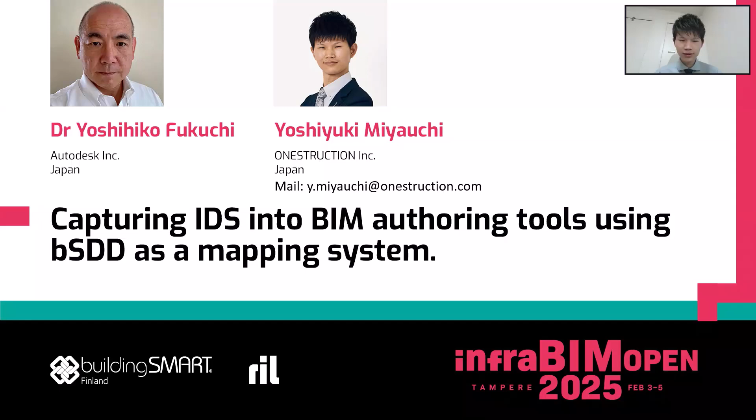Today's agenda: this is a good time to learn more about bSDD and IDS.

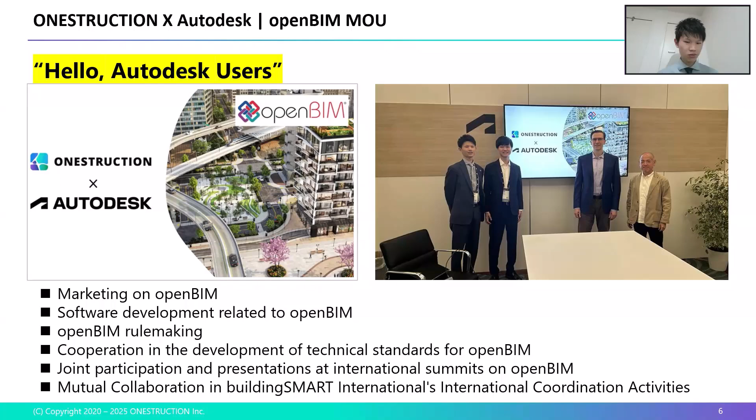First, let us introduce the value of bSDD and IDS. Various technical standards live in the economy with openBIM. Although there are many, they help each other and realize an ecosystem. This ecosystem is very flexible and has made many people happy.

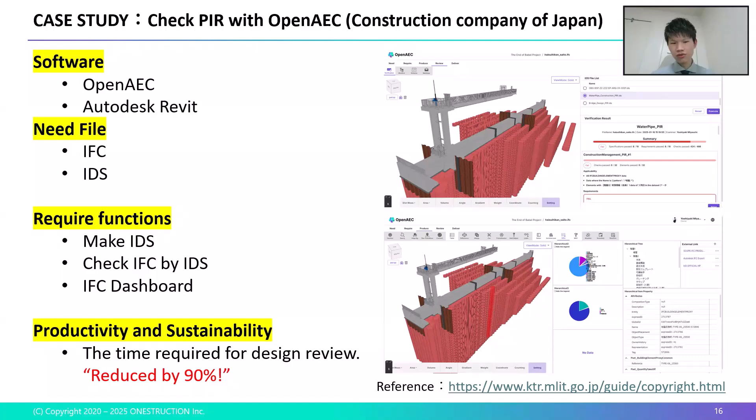This is a specific approach. First, an IDS with design performance details is created in OpenAEC. OpenAEC is designed to make the creation of IDS as easy as possible. You can specify what information requirements are requested for what part of the IFC data.

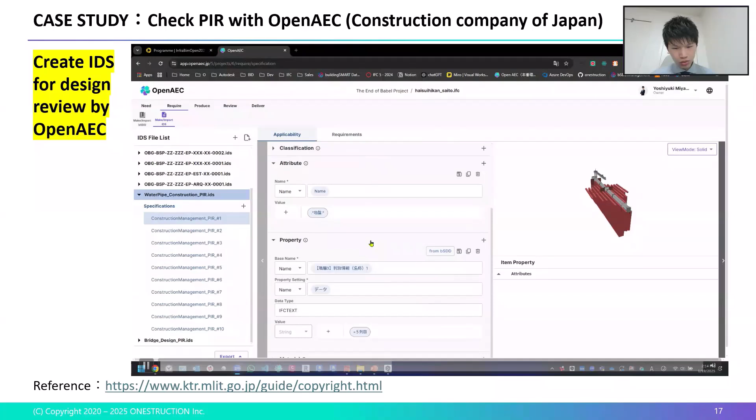Let's take a look at what's in the IDS. Various conditions can be added to the IDS. In IDS, you can configure conditions using 6 different approaches. The most commonly used would be entity, property set, and classification.

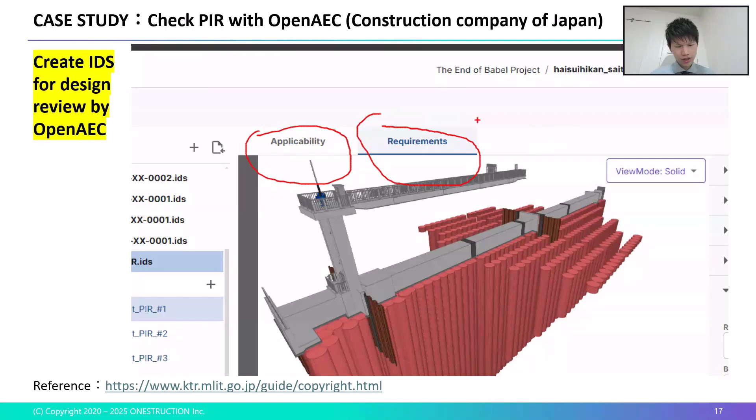Within the software, you can describe the information requirements separately from where they are applied and what they are about. Flexibility is also perfect, as you can use regular expressions instead of just stating values. The list of IDS conditions can be exported to PDF so that information requirements can be shared with those who cannot read IDS.

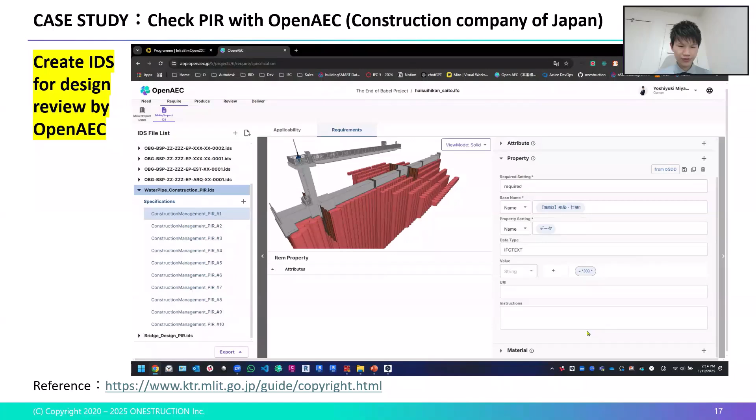Okay, next, upload IFC to OpenAEC and check it with IDS. The check screen allows viewing of the BIM data. Select the IDS you just created and press the Execute check button.

Okay, now checking. Please wait a moment as we check a large number of objects, nearly 500. It will probably take about 30 seconds to complete the check. This is checking now, okay, just a moment. Okay, check is complete. Let's take a look at the check results.

You can see how many IDS objects are being checked and for which conditions the violations exist. Of course, it's also easy to identify the objects where violations exist. All that remains is to send the design review results to the design staff and inform them of the validity of the design results.

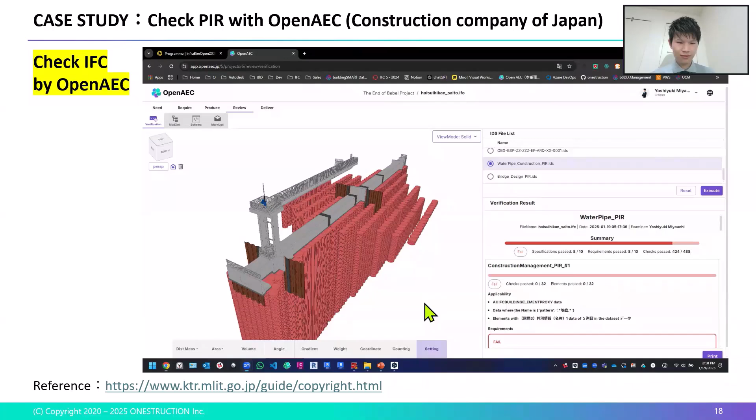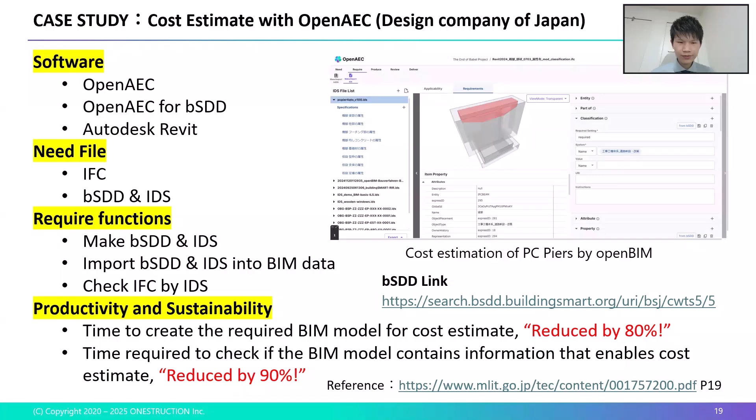Let's show a specific approach. In Japan, cost estimate has traditionally involved a great deal of labor. In particular, the process of assigning the information necessary for cost estimation to BIM, and its accuracy, have been viewed as problematic. However, with the advent of bSDD and IDS, a game changer has occurred in Japan. The issues that had been a problem up to this point, namely the time and accuracy of the granting process and the reliability of the BIM data, were solved in one fell swoop.

First, the totalization criteria were converted to bSDD with OpenAEC. bSDD can immediately convert even legacy criteria into machine-readable data. It can also specify the set of properties that each class has and the values that the properties should have. This is the bSDD data dictionary in Japan.

Once the bSDD is in place, the next step is to create an IDS. OpenAEC can create an IDS on its own, but by extracting it from a trusted source such as bSDD, an IDS can be created as an accurate and reliable information requirement.

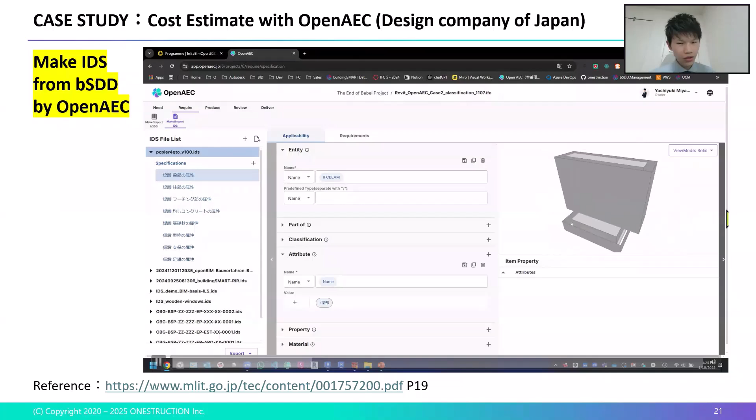All property sets required for the totalization are uploaded to bSDD. Use Revit to create a BIM model for cost estimating. The Revit plugin OpenAEC for bSDD allows anyone to easily and accurately add bSDD and IDS information to BIM data.

First, decide which bSDD and Revit you want to connect. After connecting the bSDD of your choice, decide which objects in the BIM model will be given information. You can select objects yourself or assign them to each Revit category. Incidentally, OpenAEC for bSDD also publishes an add-in for Civil3D, which allows you to further select objects by layer.

Once you decide which object in Revit you want to give information to, a new dialog box opens up. Select a class from the tree on the left, and the property set associated with the class instantly flows into the screen on the right.

Classification codes are stored automatically. This is okay. Classification codes are stored automatically. All that remains is to create the shared parameter file, which can be generated automatically by bSDD. The operator simply presses a button.

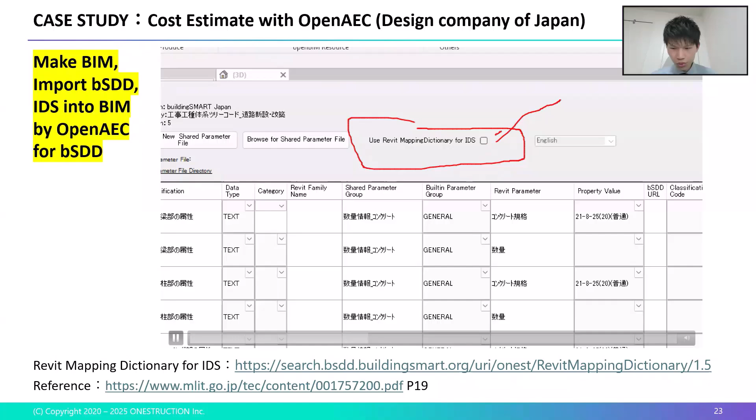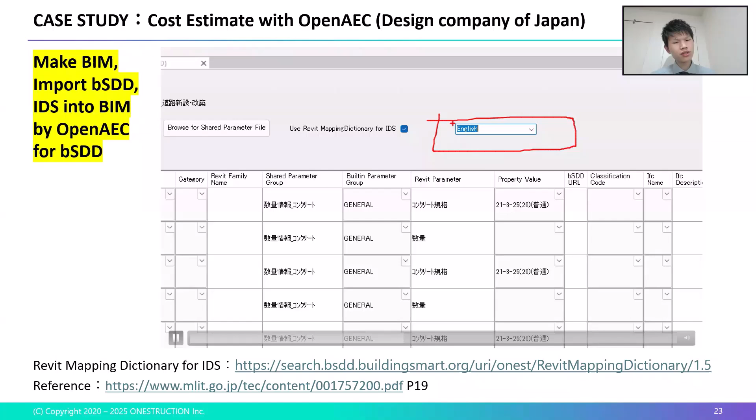Therefore, we created a bSDD that ties the IFC classes listed in the IDS to the Revit categories, using bSDD as a mapping system. The Revit categories corresponding to the IFC class could be quickly identified according to the criteria determined by the organization. With OpenAEC for bSDD, the bSDD and IDS information could be entered into the BIM data.

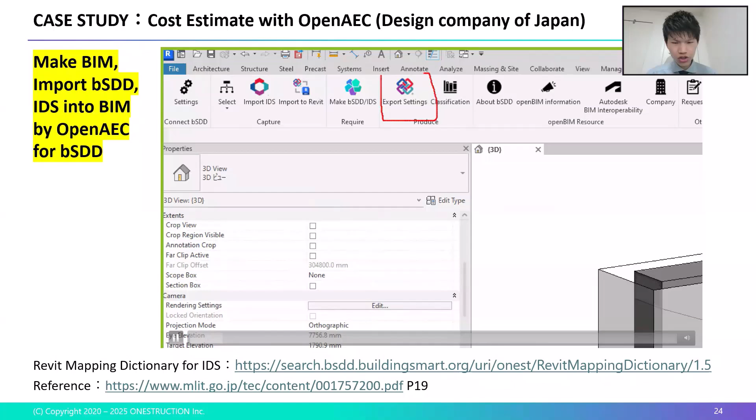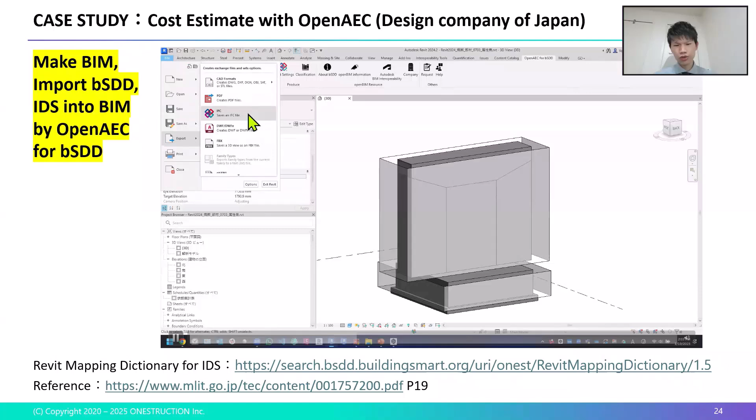Finally, all you have to do is output IFC. The plugin does all the troublesome IFC output settings. The bSDD information is also automatically entered in the classification output settings. All the operator has to do is press the output IFC button to create a compliant IFC.

Let me talk a little more about bSDD as a mapping system. The bSDD is not only a reliable source of information, but also a reliable conversion system to efficiently assign information to the various categories of objects contained within the BIM model.

Build your own mapping system between Revit categories and IFC classes. This mapping allows the system to understand the rules for each organization. One of the features of bSDD is the ability to easily link databases to databases. It's the power that bSDD truly possesses that makes it more than just an information delivery tool.

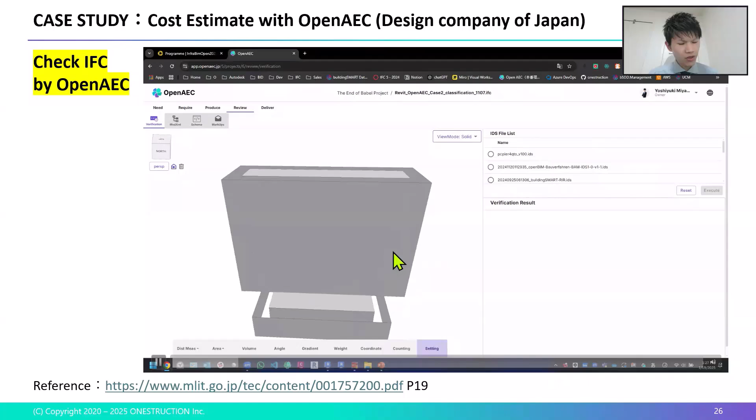Upload the created IFC to OpenAEC, which checks the IFC submitted by the worker using IDS, containing the necessary rule sets for the totalization. IDS will free BIM from more specialization, and IDS will enable the mass production of accurate and rich BIM data.

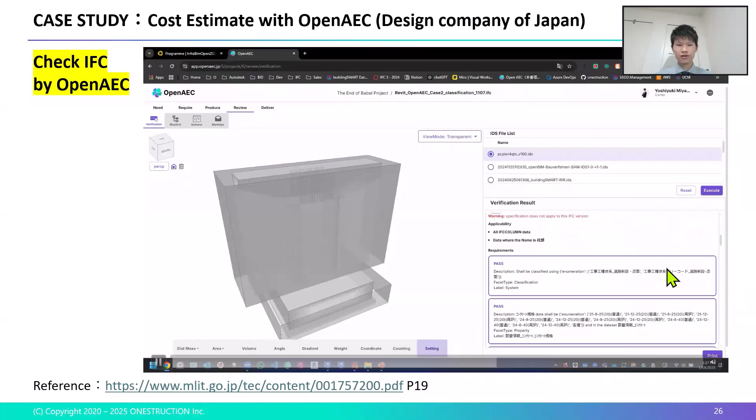Next, we present a case study that checks the EIR during the design phase of multifamily residential buildings. buildingSMART Portugal provides an opportunity for IDS to illustrate and automate the EIR in the design phase of multifamily housing. There are 4 types of IDS published: common items, general design, general structure, and general MEP.

openBIM strongly supports the realization of ISO. Explaining and publishing the EIR in an IDS, as buildingSMART Portugal has done, is a very good move. Of course, it's possible to import this EIR file in OpenAEC and perform IDS checks. IDS will increase productivity through BIM and, consequently, automation.

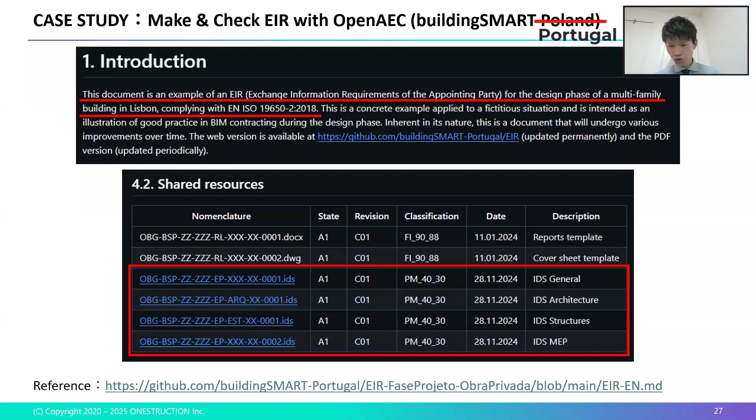Next, case studies in the regulatory process. There are many different regulatory processes around the world, and many benefits to using BIM in these regulatory processes. The purpose of using BIM in the regulatory process is to improve the flow of data between different systems and registries, enable different analyses that support life safety and health, and automate building energy efficiency reviews.

The technical standard for automation is IDS. IDS for regulatory information requirements is published in use case management. OpenAEC makes it easier for anyone to quickly and easily check for IFC compliance with the regulatory information requirements published by buildingSMART International.

Finally, we present a case study of the building permit procedure in an Austrian city. This case study is published in Use Case Management by buildingSMART International. In the building permit procedure, information requirements are described and published as IDS. Automation is realized by using IDS to check whether a model is ready for the building procedure.

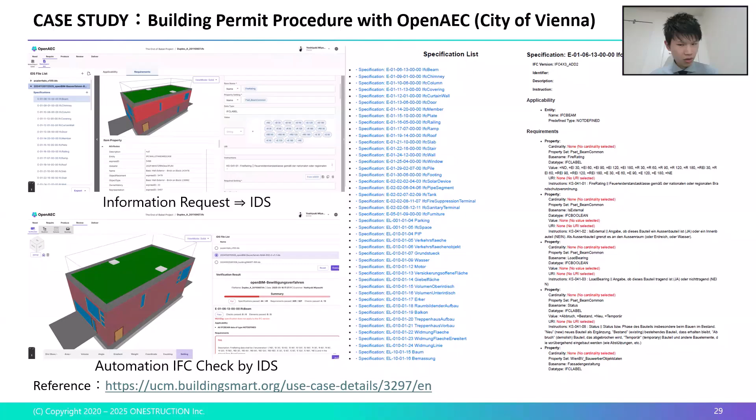Automation relieves people from the time and effort of checking model compliance. Also, as IDS are published, they can be imported into BIM authoring tools.

Let's look back at today's presentation. If you had listened to today's presentation properly, you would have understood the value of bSDD and IDS. It's more efficient to make IDS while referring to bSDD. The presence of IDS is critical for proper IFC data distribution.

Our OpenAEC is capable of supporting them in all areas. We can easily create bSDD, create IDS, and check IFC. With OpenAEC for bSDD, you can easily and accurately incorporate bSDD and IDS information into your BIM model. Now that you know about these prior examples of bSDD and IDS being utilized, why not use OpenAEC for bSDD and IDS in your BIM model?